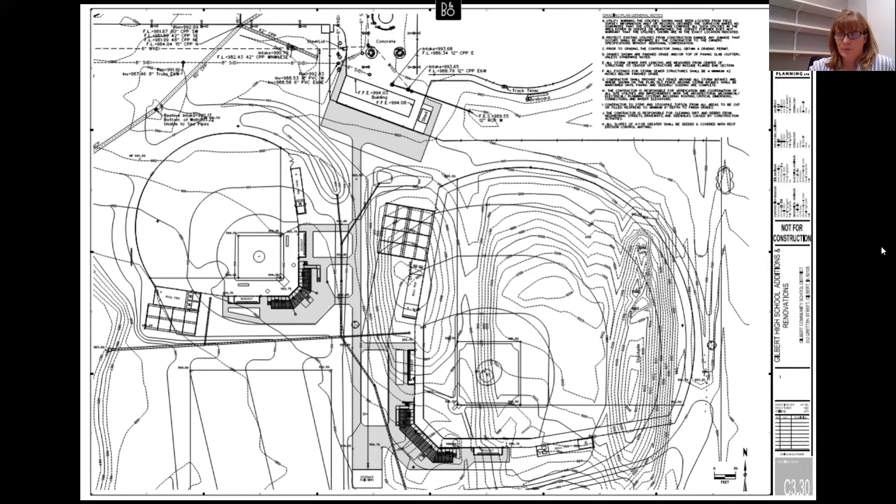You can see the dashed lines are the existing, the solid lines are the new contours. We take this data and put it into a program we call Insight, and it produces a model of the existing ground here. Then we model it into the proposed ground, so you can see the actual baseball field here.

That gives us the amount of dirt work, whether it needs to be moved from one area to the other, or what we need to remove off the site or fill onto the site to actually produce those actual grades that are out there.

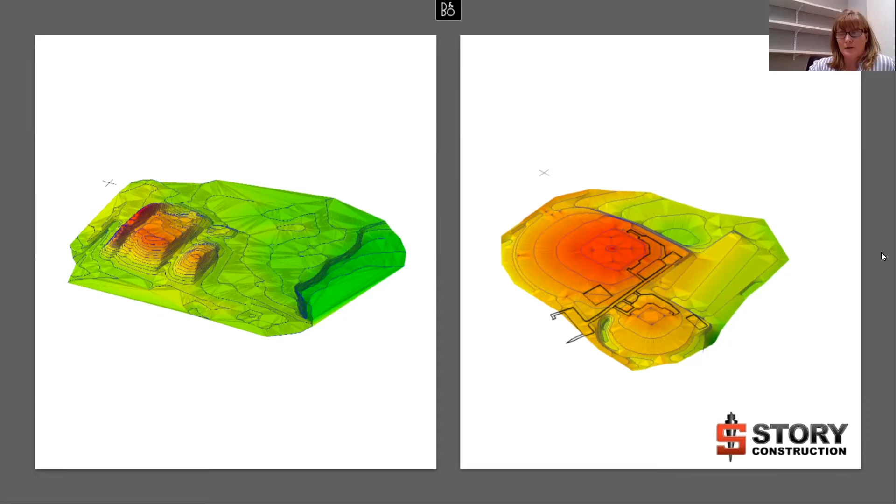Another thing we do, still with our quantity takeoff, here's an example of a plan sheet of an elevation of a building. This is actually Ames High School. Then we take and determine all the quantities.

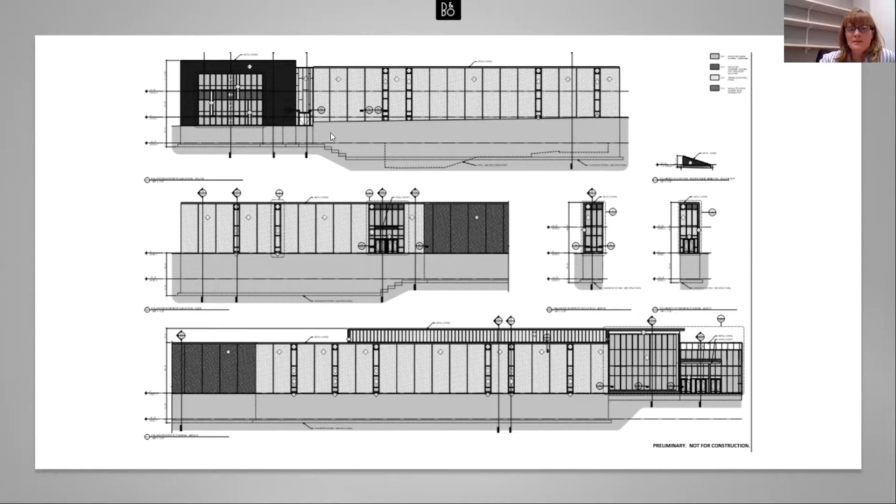On this, we have some concrete or precast concrete panels, some aluminum windows or regular windows you'd see in a normal building, and probably some metal panel exterior on here.

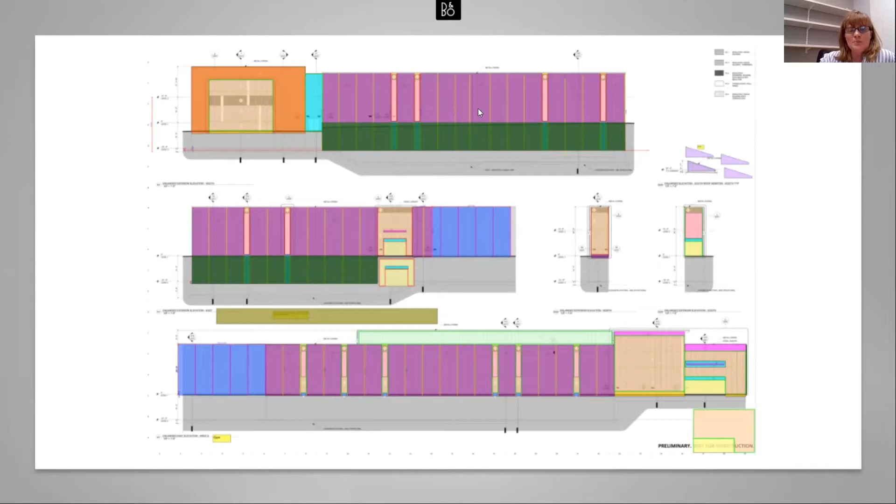As you can see here, what we do is color it up, so to speak, in our program, which helps us determine the quantities. That's how we get our quantity takeoff.

When we bid a job, we get quotes from subcontractors and have to make sure they're all equal. To do that, we use tabulation sheets such as this, and make sure their scopes of work, what they are bidding to us, is apples to apples. So here, make sure this company, Elder, we don't have to add anything to their scope to make it equivalent to Hallbrook here.

That's another way we analyze data. Well, I'll hit it next. So my educational background is fairly similar to Melinda's.

I started at Iowa State in the engineering college, intending to go down either the civil engineering or construction engineering path. I spent my first year understanding the differences and what those might look like as a career, and decided on construction engineering, mostly because I wanted a little more connection to the field and the actual buildings going in place, whereas a civil engineer would take on more of a designer role and sit behind a computer screen.

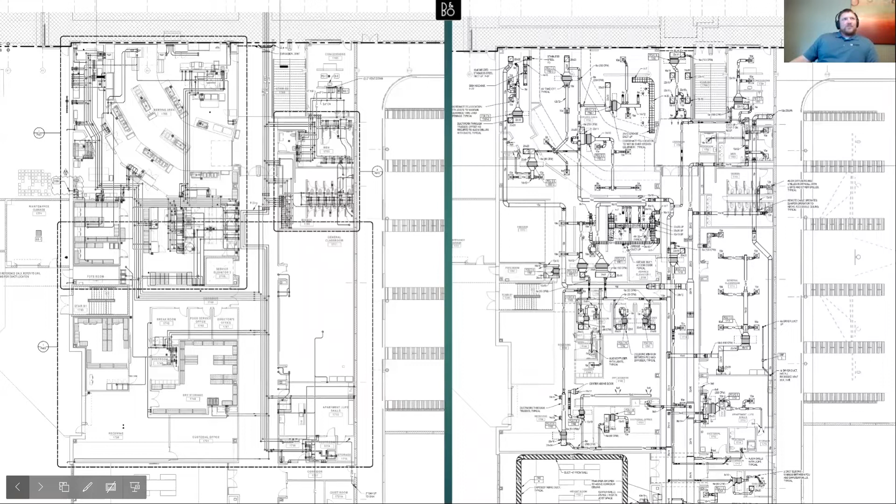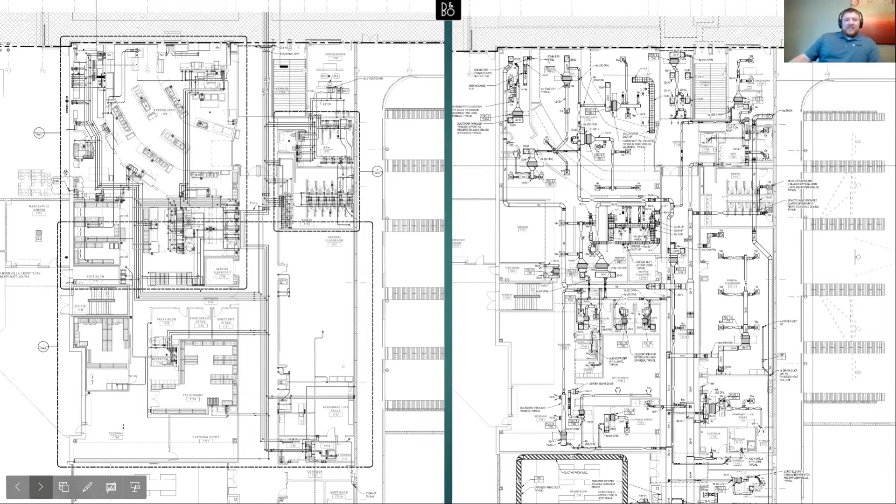These two drawings show coordination in a 2D world. You have a blueprint and you've got to look at it. These images side by side are both of the kitchen area at Ames High. On one, the small lines are plumbing piping, so you can see where water lines run in the building. The next drawing shows ductwork, where ducts are supposed to run. The biggest thing I spend my time on is determining what the path might be. In a 2D world, we'd overlay those drawings to see, with one on top of the other, what that looks like—the ductwork here is red and the piping is green.

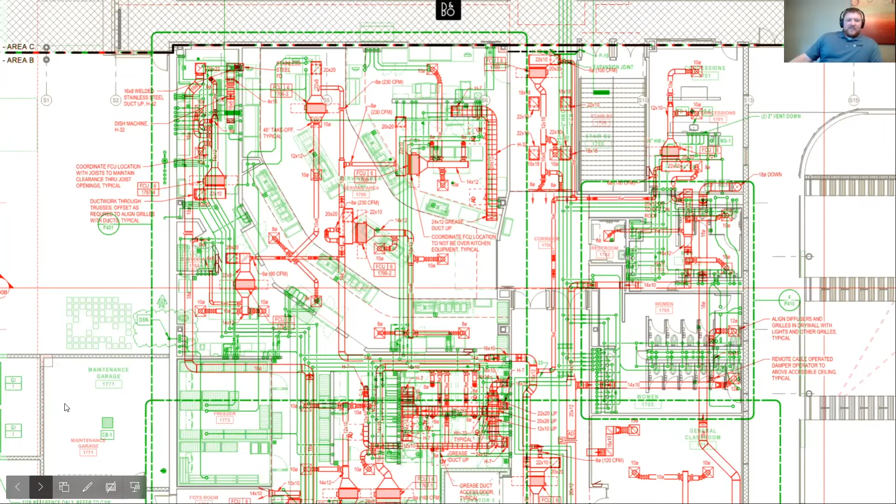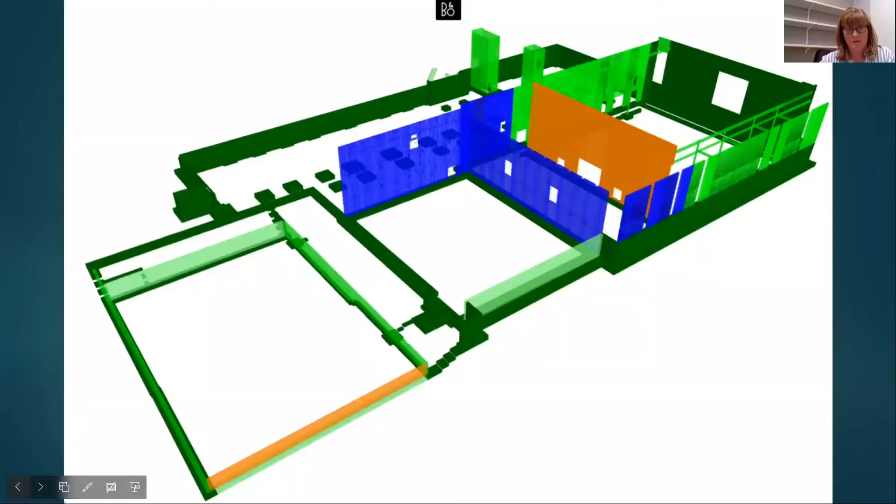In construction, rework is the enemy. Anytime you do work and it has to be removed and reinstalled, all the work to remove and reinstall it, and any materials you lose in that process, is all added cost that you can't recover.

If we can do more planning and detailed planning with virtual design and construction, that prevents rework. So that's kind of a nutshell of what I do.

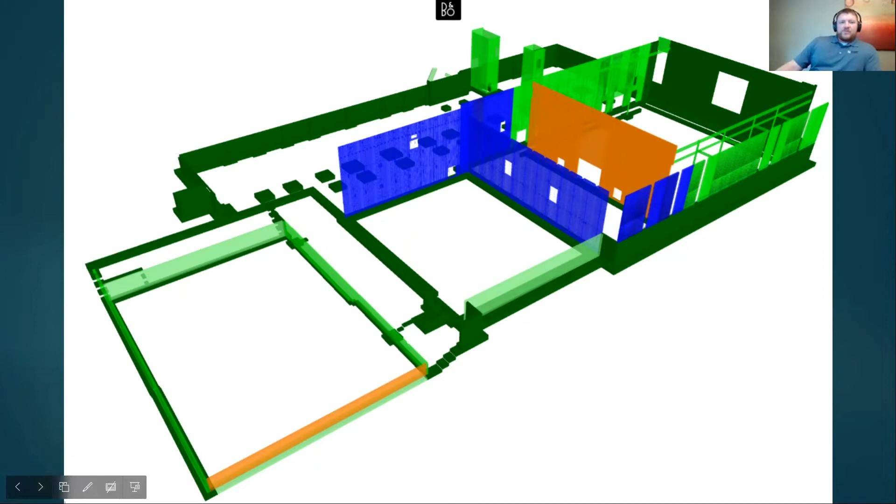The next slide shows what a 3D schedule might look like, for Ames High School. The dark green shows work we've completed, light green was work one week out, orange was two weeks out, and blue was three weeks out. This uses a model to show footings, precast walls, and a little structural steel. That visual allows people to absorb quickly where work is planned and how it's going to proceed. So those are the things I do and create in my job.

It's a lot of time understanding computer programs and CAD programs, but it's certainly helpful to the crews in the field, and that's what makes it fun for me.

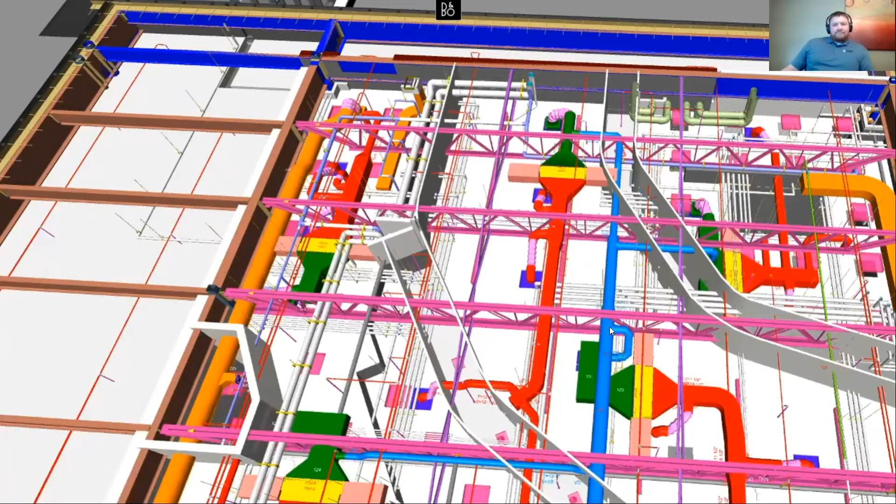One thing I was thinking as Sean was talking, since we can't get it to play - right here where this blue pipe runs through this pink, what would be called a joist. If that pipe was up a little bit or down a little bit, Sean would be able to determine that, and his program should be able to determine that. So before they get out here and build this, we would already plan on moving this pipe somewhere else, so that the entire run was adjusted prior, and we wouldn't have rework. Hopefully that makes sense.

Thanks, Sean. Does anyone have questions for Sean about his particular role within the company?

One thing with Sean, Adam and I all started, we were using strictly paper drawings. This is something that's kind of new in construction - I don't know how many years ago, but just more recent - using models for all this purpose. This is a new type of career; not everybody has a virtual design and construction engineer on staff. I envision there'll be a lot more in the future.

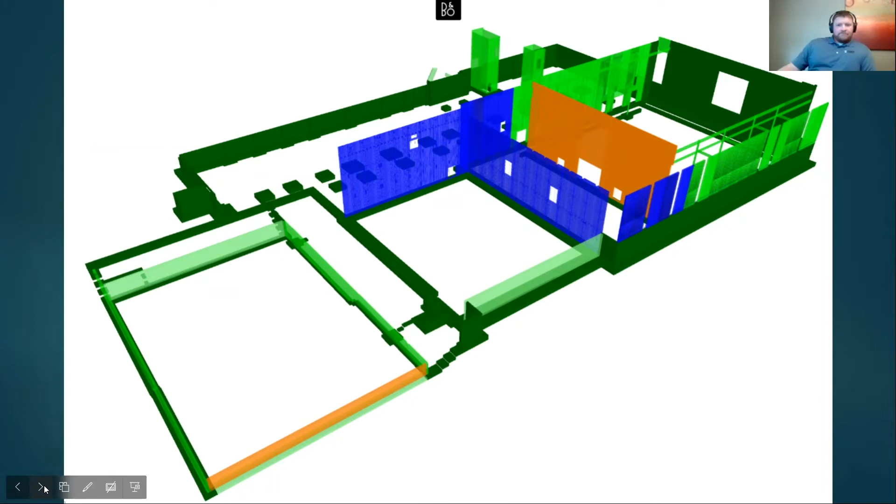So we'll have Adam talk a little bit about project management. Adam, why don't you give them your background - Adam has been with us for 20 years, so maybe he can give us a little background of his role here at Story, what he started and how he got to project manager.

Yes, so educational background - I also have a degree in construction engineering from Iowa State. I got into the engineering field, specifically construction engineering, because as I was growing up I spent a lot of time on a farm, did a lot of things with my hands. As I grew older, into high school, I had an older sibling who was looking to go into architecture, and that intrigued me a little bit, but I wanted to do more of the building. So I decided on construction engineering, came to Iowa State, and was right into the program.

As Melinda said, I've been at Story Construction for 20 years. Actually, today is my 20th anniversary, so that's kind of cool. Out of college, I was hired as a project engineer, then I transitioned into a superintendent, and currently I'm a project manager, as Melinda has mentioned.

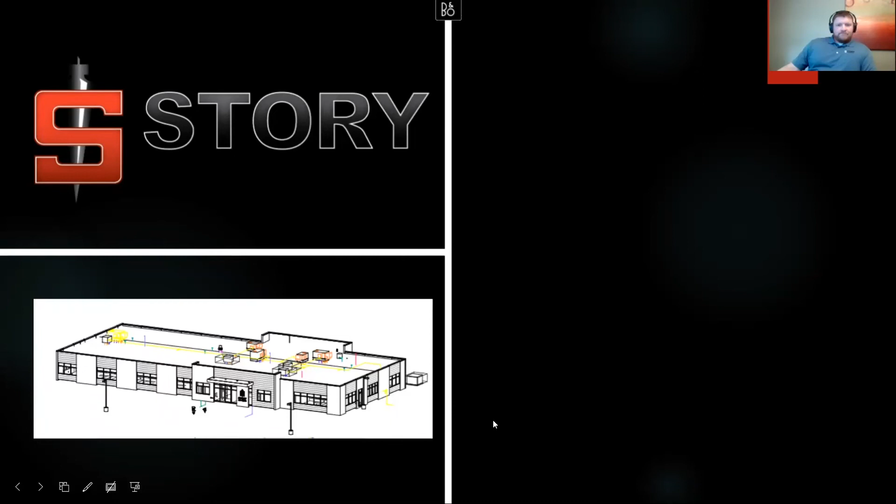We have superintendents at Story Construction that didn't go to college, didn't go to trade school, but are still in a superintendent role. They started out probably as a laborer, crew leader, or foreman, and have just worked their way up. So I don't want to pigeonhole anybody into thinking you have to go to a four-year school, because Melinda, Sean, and I did - there are absolutely opportunities at Story and in the construction industry without that education.

I help develop and manage the project schedule, and that's in conjunction with the superintendent and the engineer to start with, but ultimately all of the team players that are on our job. I help manage subcontractors, and that management is probably more behind the scenes - negotiating and writing contracts, as well as purchase orders for materials. If there are issues that come up, generally they get bumped up to my level, and I communicate and coordinate with the subcontractors to get them ironed out.

The constructability review is probably something that we do early on in the job, also some pre-construction services. So we work through the drawings with designers and owners to make sure what they're drawing is something that's feasible and easy to build. If there are materials or methods of construction that we can change to make it easier, that generally makes it less costly. Those are all things that the owner is looking for, and us as builders, we're looking for that too, because the ease of construction and building then becomes easier.